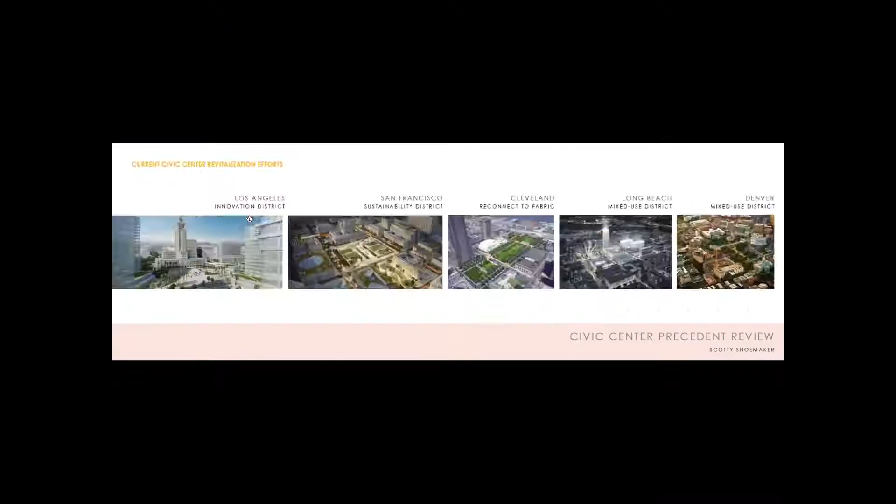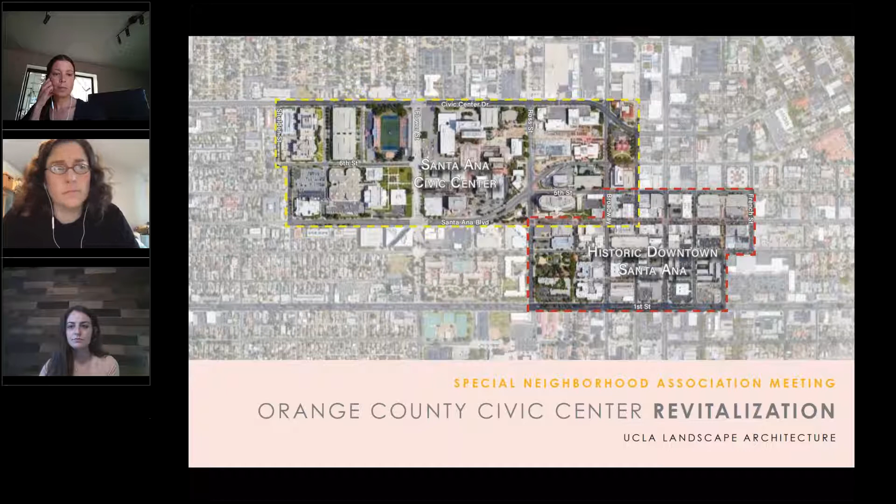My name is Chuck Ware, and I am a practicing planner, urban designer, and landscape architect, and I also teach public space design at UCLA. I wanted to thank Scott for facilitating our participation in the session tonight, and to all of you for attending. I'd like to suggest that the purpose of our portion of the meeting is to initiate the process of collecting community input regarding our forthcoming Civic Center study. We're interested in your comments on the current state of the Civic Center and its great potential role as a civic destination. So any comments regarding issues, problems, or opportunities are welcome.

I should tell you about the UCLA Landscape Architecture program very briefly. It's a very well-established program entering its 5th decade. Faculty are all practicing professionals, and we promote the very ambitious role of design in addressing big global issues. So there's high aspirations for the program in this design studio.

The specific purpose of this study is conceptual revitalization of the exterior public spaces in the Civic Center. We are interested in a transformative role for these public spaces rather than just fiddling around a little bit. Last year, we initiated the study in collaboration with a range of city and county agencies. This year, we're also working with the Neighborhood Initiatives Program and Downtown Inc. We're working to make significant improvements to the 2019 effort, partly by placing greater emphasis on community engagement, and secondly, improving downtown relationships. So that's my introduction.

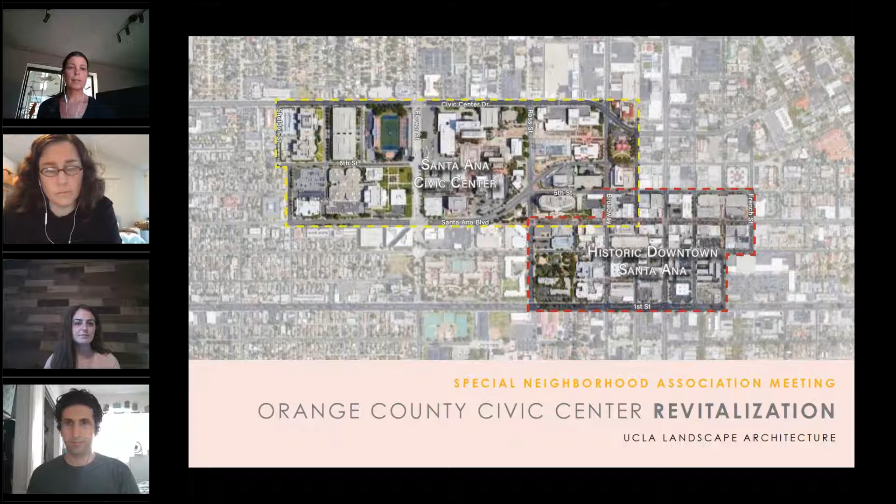From here, Lisa would now like to highlight some in-progress analyses. There will be 5 of us who make contributions to this presentation before we open it up for comments and discussion. Next slide, please.

Hi, my name is Elisa Moffett, and I'm going to summarize our site analysis. We initiate the design process with site analysis to identify the problems and opportunities in a site, and also to set a baseline to measure future successes. I will briefly run through our conclusions.

The Civic Center has unrealized opportunities for placemaking ambiance. There is minimal daily social or recreational use. The Civic Center is disconnected to adjacent urban districts. And there are unrealized opportunities to tap into downtown economic vitality. We also found opportunities to create an environment that inspires a sense of safety.

Opportunities exist to improve views by designing landscape-based scenic quality. The spatial structure of the Civic Center currently lacks cohesive spatial hierarchy and sequence, and there is a great opportunity to utilize trees to perform spatial and environmental functions. There is pervasive hardscape and rooftop surfaces combined with a lack of green space that limits sustainable water management practices. Hot hardscape conditions require shade and ventilation, and there is a proliferation of buildings with non-transparent ground floor facades that compromise the public space vitality.

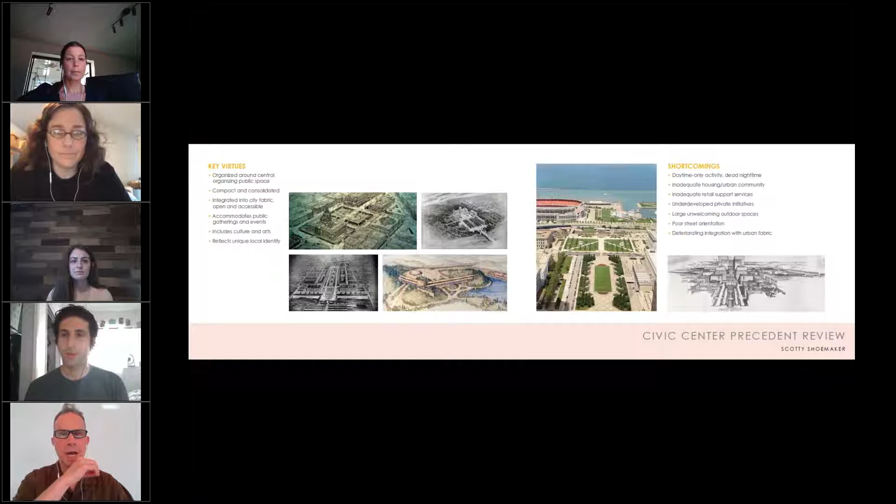Okay, good. So I'm just going to briefly talk about the history of civic centers in cities across America, and then draw upon some examples of current civic centers in the process of their revitalization plans right now. At the turn of the century in the 1890s, there was something called the City Beautiful movement, and a lot of cities across America started building these big grand civic centers, a lot of what we see today, with large open spaces, formal landscaping, and big fancy Beaux Art style city halls. These had a lot of benefits and they were really gorgeous, but we're also realizing they have some shortcomings. Some of these main shortcomings are that they aren't necessarily connected to the rest of the city, and they can get really quiet on weekends and in the evenings.

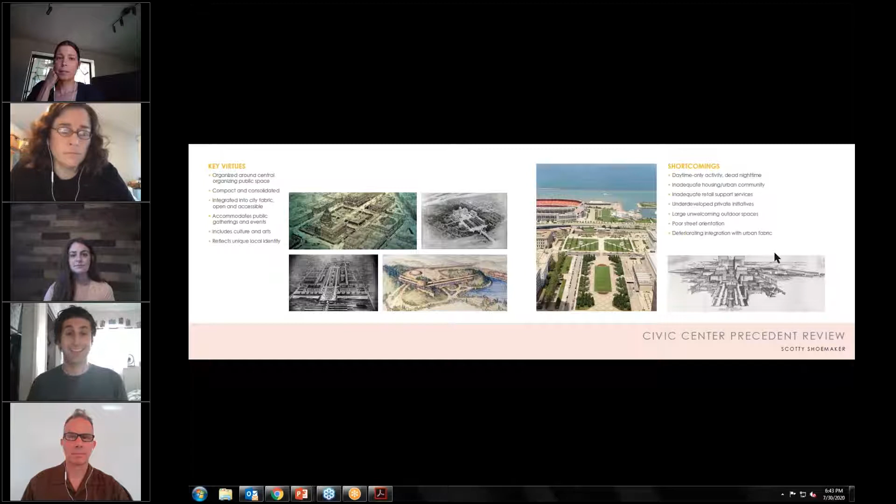Next slide. So what cities are doing across America right now is trying to reconnect their civic center spaces to the rest of the city. In Los Angeles, they're creating what's called an innovation district, where they bring in more innovative businesses. San Francisco is trying to make their civic center an example of sustainability. Cleveland is working to reconnect their civic center area to the rest of the city and also reconnect it to the lakefront. They built a large freeway that cut off the civic center from the lake, and I think they're going to build back over that and reconnect the civic center to the lakefront and the rest of the city.

In Long Beach and Denver, we can see that they're trying to create a more mixed-use district. This means bringing in more retail and more residential. Not only does this make civic centers more vibrant, but it can also provide some funding for the events and other opportunities that happen in civic centers. So we can look at these examples as we move forward and think about Santa Ana. Next slide.

Good evening. My name is Rachel Dwork, and I'm here to introduce a brief survey that we've put together to collect your thoughts and gauge your opinion towards opportunities for the Santa Ana Civic Center. Topics include reason for visiting the Civic Center, accessibility, amenities, programming, and plant material. Ultimately, we want your input to guide our design process.

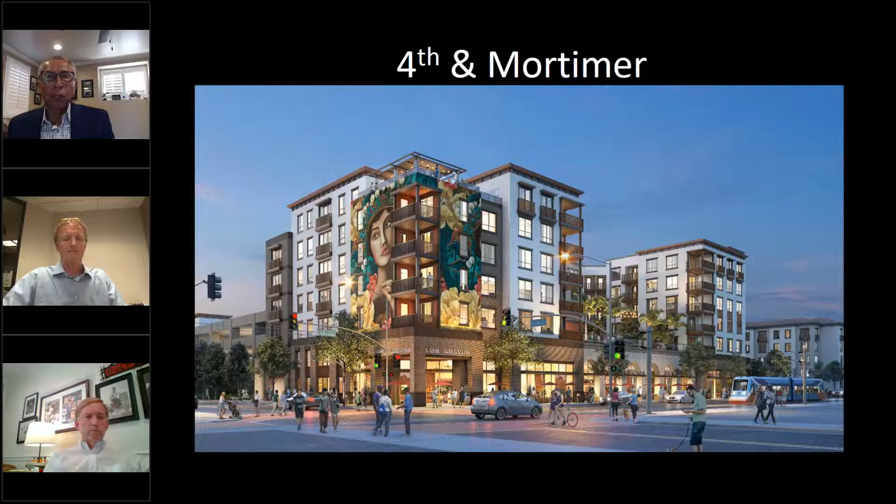So if we could please go to slide number 2 that speaks to the project highlights. At this project we have a mixed use building with ground floor retail and 169 residential units spanning 2 blocks bounded by French Street to the west, Mortimer to the east, with 4th Street to the south and 5th Street to the north. The mix of residential units consists of 12% studios, 22% 1 bedroom, 39% 2 bedroom, 9% 3 bedrooms, and 20% 4 bedrooms. This is a transit-oriented development that puts housing in the right place in the downtown area, as well as where the planned streetcar line will run. Recognizing that parking is oftentimes an issue, this one actually exceeds the parking standards at 2.35 stalls per unit.

We've been working closely with city planning, and the project meets all city codes, planning guidelines, and the intent of the transit zoning code. Naming off a few of the project contributions and economic benefits, the project is anticipated to generate $9.3 million net benefit to the city general fund over 25 years. It's going to contribute $500,000 toward community parks and $450,000 to public schools. There's also going to be construction jobs and permanent future jobs that will result from this project. So next slide, please.

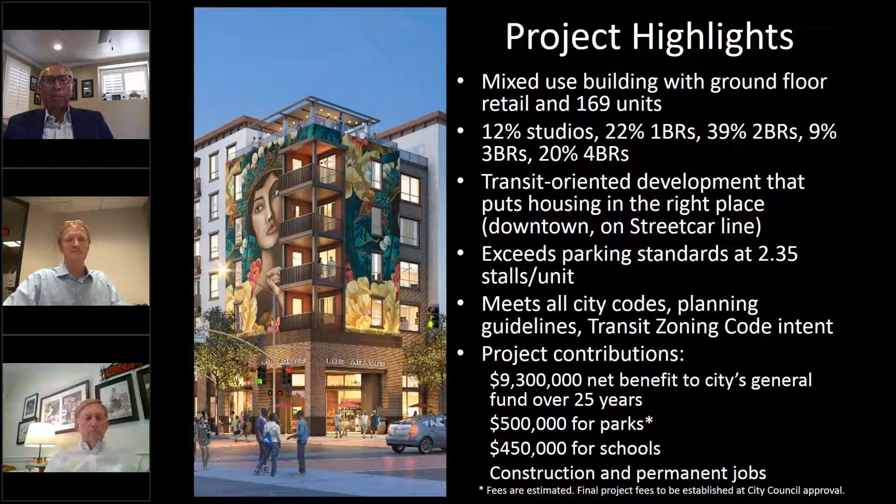All right, so this will take us to the general design. There's going to be, again, a mixed use project that will include over 11,000 square feet of retail and restaurant areas on the ground floor of the west building. There's going to be a sky deck amenity on the 7th floor of the west building as well, with enhanced landscaping that offers a nice pedestrian experience. The project is going to include a visible public art component, and it's going to have quality amenities, architecture, and living spaces.

So next slide, please.

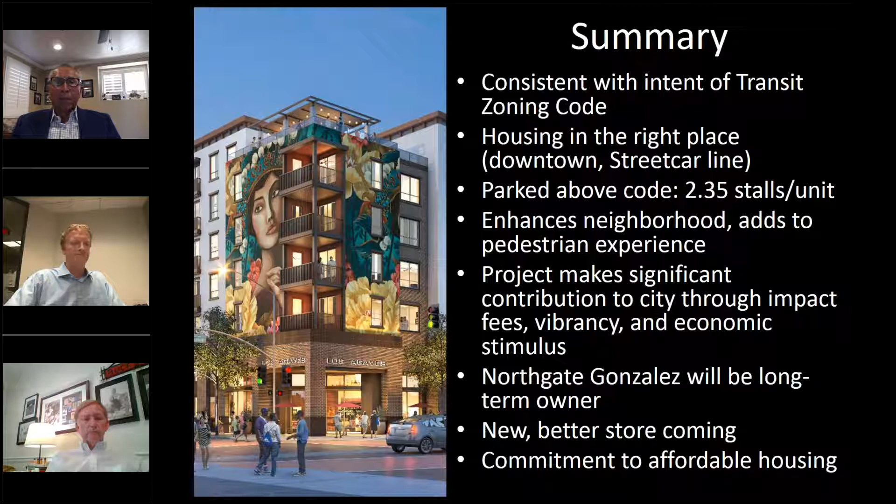The next slide shows how you can email and contact either Andrew or myself should you have further questions or want to have a meeting to discuss the project later on. At this point in time, we are open to answering any questions you might have.

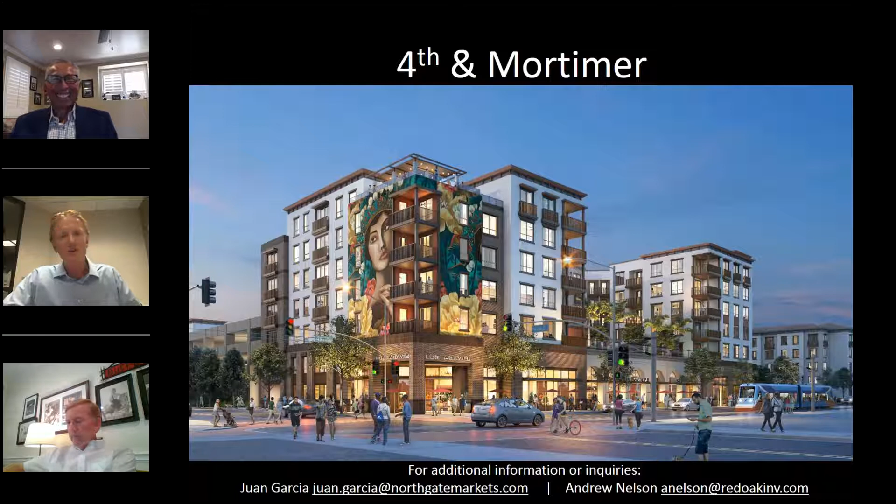Good question. Maybe Alyssa Ventura, you could page down five times. This one just shows location, that's the one we want. So here's the site plan for both blocks. The current store is on the left block, which is on the west at 4th and French, of course. This development will cover both this block and the one to the east.

So each block has its own parking garage, accessed off of 5th Street. The colored boxes here, yellow and orange, are the residential units that surround the parking structures. The yellow units are 5 stories tall, and the orange units are 7 stories tall, with 5 over commercial spaces on the ground floor.

And again, if we have a longer chance to talk with any of you that reach out, we'll show you more drawings and plans, and we're happy to do that.

Okay, excellent. There's a question from Erica whether there'll be an environmental impact report performed on this project. I can do that one too, unless city staff wants to jump in. The analysis here fits under the environmental impact report that was done for the overall transit zoning code area, so we're fitting the project in under that, with an addendum to that analysis.

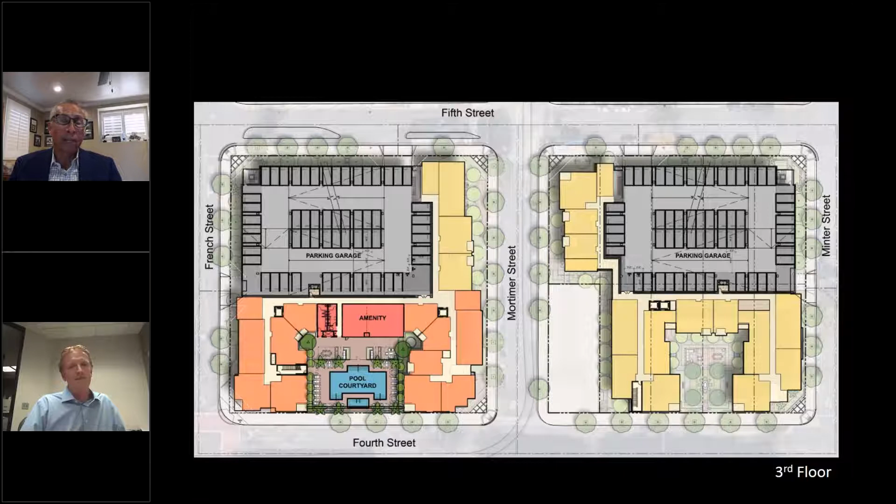Sure, I'll just go ahead and make a couple of final comments. We want to make certain that we address the concerns of the local community, and that we partner and work with one another to address any concerns that are out there. We're truly excited about this particular project, and also the potential for the other one we're working on. As I indicated before, we're looking forward to announcing what that project is in the near term.

Okay, excellent. Thank you very much, Juan Garcia. Thank you for the presentation. And again, for those who asked questions tonight, unfortunately we weren't able to get to all of them, but we got to most of them, I think. We will be providing them to the development team, and Mr. Juan Garcia and his colleagues will be able to respond to you on those. So thank you again, Juan. We really appreciate it. Thank you, Scott.

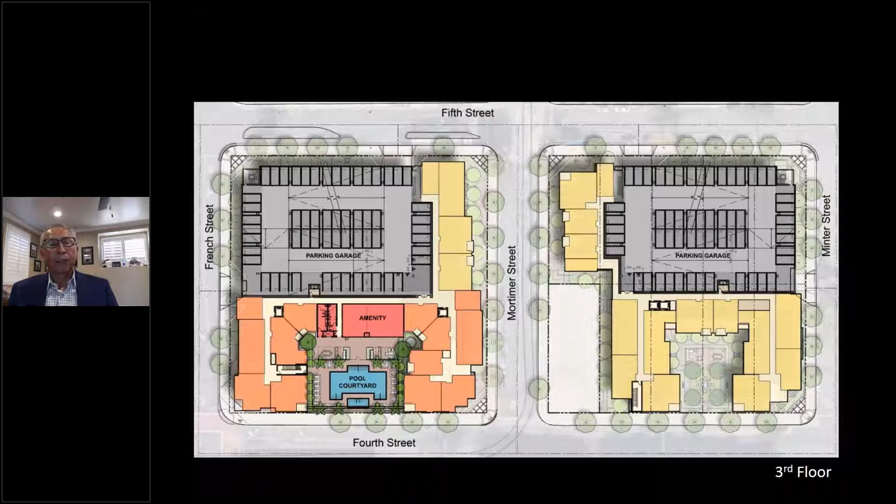At this time, I would like to recognize the presenters on our third agenda item. The team from Santa Ana's Public Works Agency will be presenting information on Civic Center Drive and Bush Street safety improvements. I would like to introduce our city engineer, William Galvez, and his colleagues from Public Works, who will be sharing an update with the community on this agenda item, which we initially started talking about almost a year ago. So it's timely that we all get an update on it. William, I'm passing this over to you.

Great, thank you, Scott. My name is William Galvez, city engineer. In this room with me is Nabil Saba, our Public Works Director. I wasn't sure if he was going to be joining us, but I'm very happy to provide the community with some information. I wanted to thank Scott Kuttner and all of his neighborhood efforts to reach out to, in particular, three communities that are very interested in this project, and that's the Lacy, the Logan, and the French Park neighborhoods. So thank you all for participating. We're looking forward to receiving questions and comments from the community.

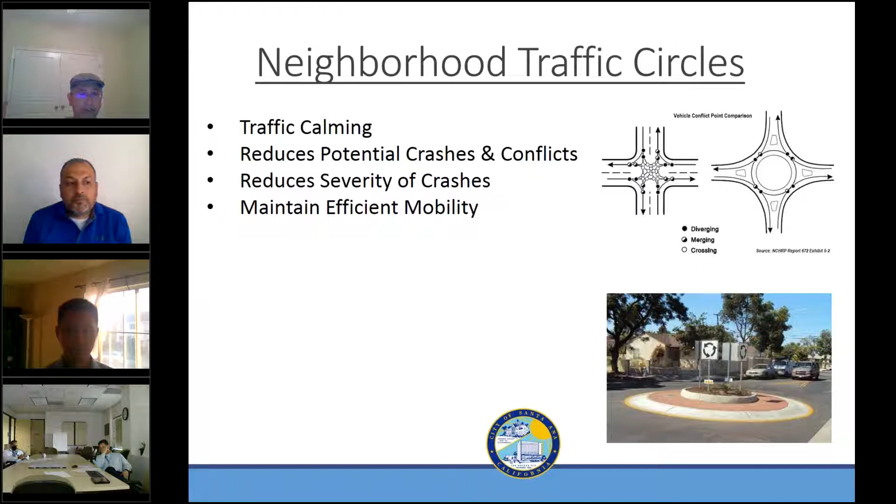Another design feature is bulb outs. Bulb outs are street narrowings that also serve to calm traffic. The narrower cross section makes the roadway a little more uncomfortable for drivers to speed by at higher speeds, so some speed reduction is accomplished just by physically narrowing the roadway. Bulb outs also increase visibility between pedestrians and drivers by placing the pedestrian in a better, more advantageous location closer to the roadway.

When a pedestrian is standing at this new location on the bulb out, if they look down the street, they can see further, giving them more opportunity to figure out whether it's safe to cross. By the same token, as a driver approaches that intersection with a pedestrian stopped at the bulb out, they too have more time to recognize and react appropriately to a pedestrian about to cross the street.

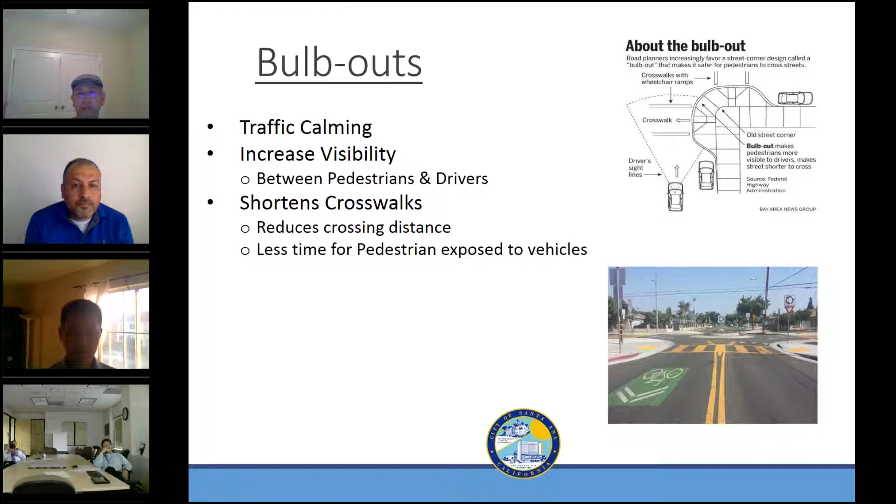Finally, bulb outs also shorten the crosswalks. This is done by reducing the crossing distance. If the time to cross a crosswalk is reduced, pedestrians spend less time exposed to vehicles while crossing the middle of the street. Next slide.

All right. I think it's Gilbert's next.

One of the engineers helped design this project. I want to talk about some of the highlights that my colleague Zed pointed out that we implemented on this corridor. I'll start off on Main Street, where we did a traffic signal modification for a dedicated left on the east and west side of it. Then we moved over to Spurgeon.

On Spurgeon, they already built the bulb outs there. It's going to be hardscape, and we're going to put a BMP measure there to infiltrate some of the water from the north side of Civic Center. The next one was French Street, where we also did a bulb out on the south and north leg of Civic Center and French.

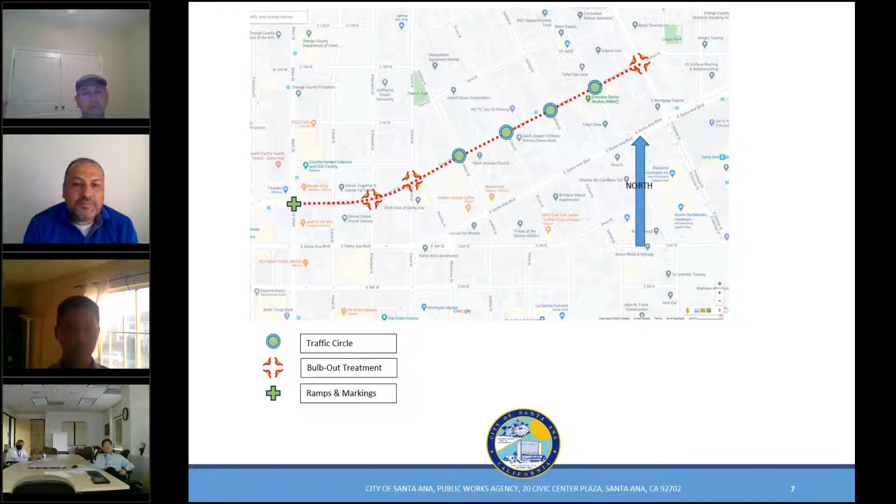Good evening, everyone. My name is Kenny Nguyen from Public Works Agency. I'm the project manager for the Bush Street project. Tonight I would like to give you an update on this project.

The project limit is from Civic Center to 17th Street, as William mentioned. We also coordinate with the fire department because Bush Street is one of the corridors that fire trucks access very frequently, so we had to place the traffic circles and bulb outs so their fire vehicles could pass through without too much obstruction.

For this corridor, we are proposing traffic circles, from your right hand side, near 8th Street, 9th Street, 12th Street, and 16th Street. Those are the circles shown on this slide. We're also installing bulb outs at 10th Street, 11th Street, and 14th Street, shown as the red squares on this figure.

On top of that, we're also upgrading some water and sewer facilities between 8th Street and 14th Street. Additionally, in the traffic circles and near the bulb out areas, we're adding some landscaping. Next slide, please.

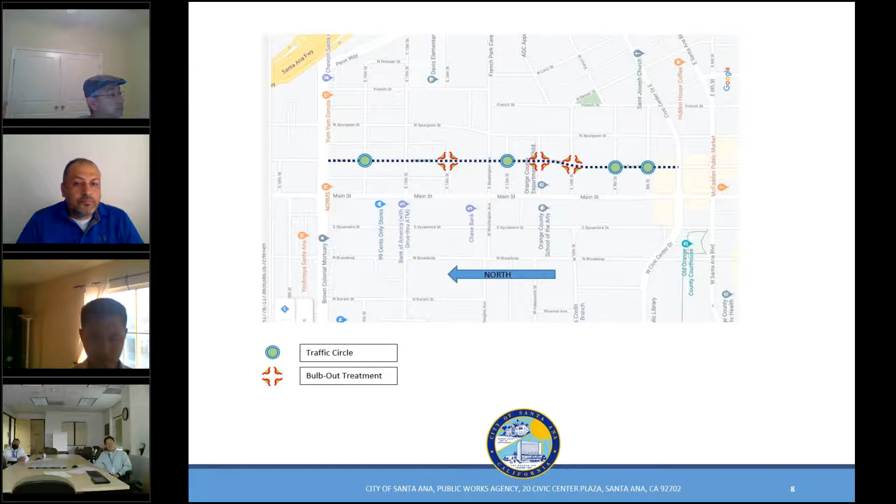For this Bush Street project, we started construction at the beginning, on a Monday, and the plan is to complete construction by the end of this year. We are currently analyzing the water system to try to minimize downtime of water service in this corridor.

We will let you know if there's any downtime, and we will notify you before we have to turn off certain service in the area, but we'll try to minimize that downtime.

So now I'm going to turn back to Gilbert to update on the Civic Center project.

Kenny, one quick question. What's the value of the Bush Street Bicycle Boulevard? The bike portion alone is $1.2 million. The water and sewer improvement is another $1.1 million, so about $2.3 million total. Thank you.

Okay, I'll give you guys a status here on Civic Center Drive. The contractor is Aramexx. They started at the beginning of the year, and they've been moving pretty good. They've already completed the traffic signal at Main and Civic Center.

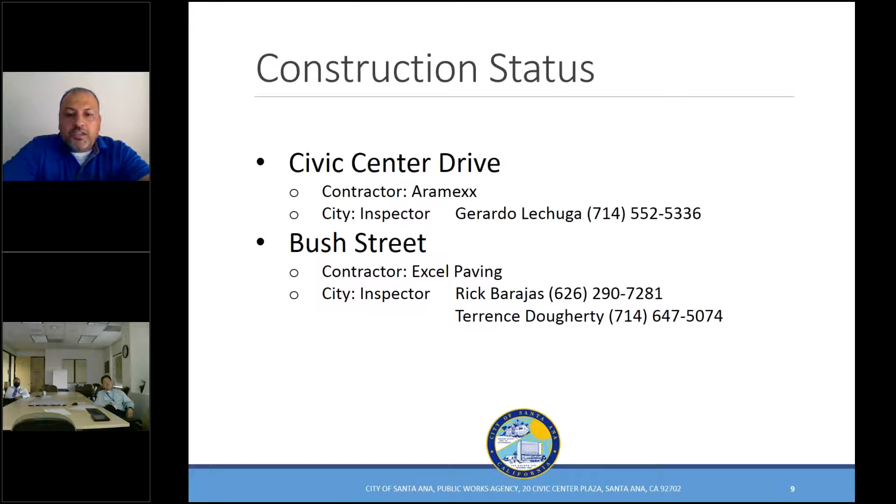Next slide. Oh, I'm sorry. Inspector for this one is Gerardo Lechuga. So if the residents have any questions and concerns about access, drive access, and traffic control, you can contact him. His number is there.

Next slide, please. So we wanted to tell the community a little bit about the neighborhood traffic concerns that we've been hearing over the years, and those concerns have led us to secure these grants. When we've secured these grants, we're also doing paving improvements, but we try to do more with the dollars that we've been granted.

The neighborhood concerns that we've heard over the years include concerns with nearby developments, other public works projects, and some of the coordination efforts necessary so that one project is in harmony with another. We've also heard that the community is concerned with the lack of stop sign compliance, speeding, traffic intrusion—another word for cut-through traffic—and the fact that we need to continue to respect any historic neighborhoods.

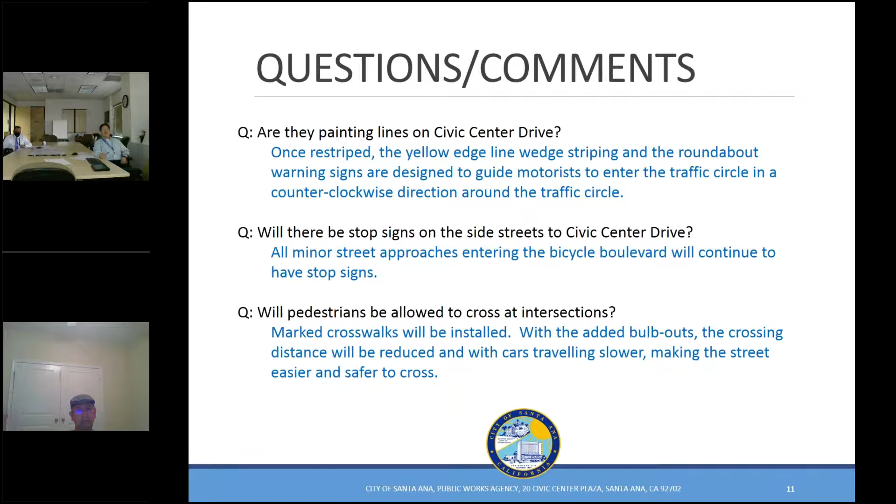One question we received is, are they going to paint lines on Civic Center Drive? The answer is yes. We're going to restripe with yellow edging around the roundabouts, put in warning signs necessary to guide drivers around the traffic circles, and make sure traffic is moving counterclockwise around them. So yes, we will be painting signs, lane lines, and markings.

The other question was, will there be stop signs on the side streets that lead into Civic Center Drive? The answer is that all of the minor streets that approach Civic Center Drive and the bicycle boulevards will continue to have stop signs. So vehicles on Civic Center Drive will continue to have the right of way, and all the side streets will need to stop.

The third question is, will pedestrians be allowed to cross at intersections? The answer is that the intersections will have marked crosswalks, and yes, these will be installed. With the added bulb-outs, the crossing distance pedestrians navigate will be much shorter, so pedestrians will be much less exposed to traffic, reducing the travel distance between streets. We think this will make it easier and safer to cross the streets.